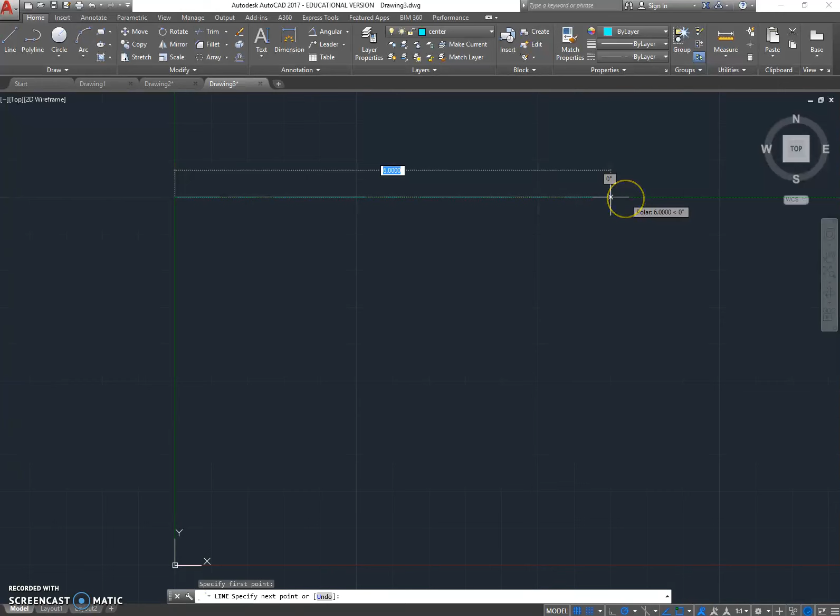I'm going to start by creating my center lines. I'll select the center line layer, and let's make a horizontal center line that is 6 inches long, and then a vertical one that's 3 inches long, and I'll move the vertical one onto the horizontal to establish my center point.

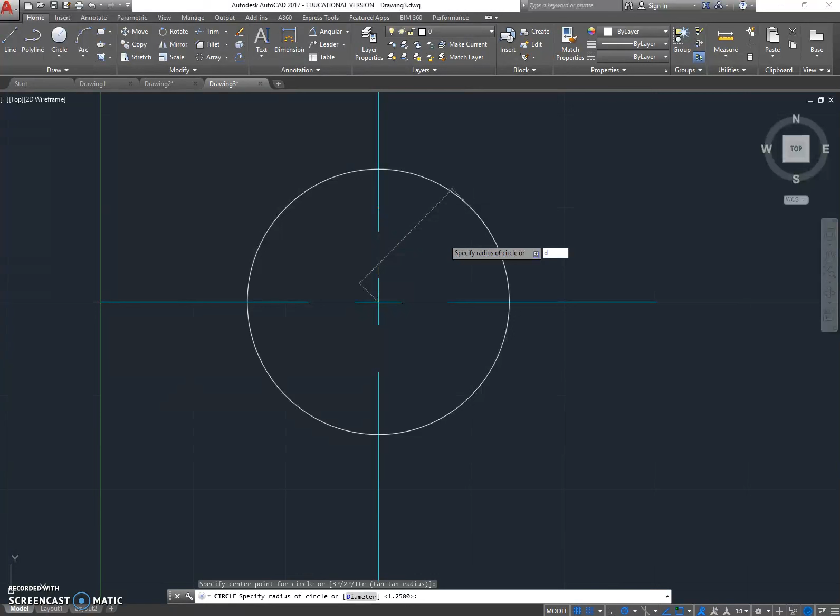This knob has a couple holes in its center. The through hole has a diameter of, well, in the book it says 0.188, but I believe that's 0.1875 - it's been rounded off. The countersink has a diameter of 0.44. I believe that really is 0.44. So I'll select D for diameter, 0.44.

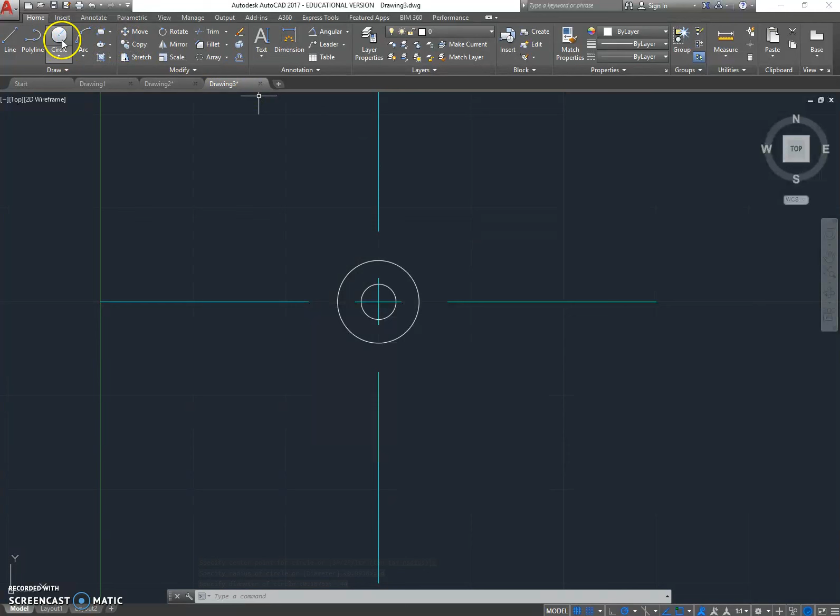The knob itself has a diameter of 2.5. And then it has all these arcs that are cut into it. So I need to find a way to position all of them around the outside of the knob. And we're given that information in the upper left quadrant of the drawing in the book.

What I'm going to do first to help get the first circle located is to do a copy rotate of one of my center lines, the horizontal one. I'll select it, rotate it about its midpoint, select C for copy, and I want to rotate it clockwise, which will be negative 22.5 degrees.

Okay, and also the book shows us that the center point here of the first circle that will be used in the polar array is 1.241 inches over to the left of the center line, and from the horizontal center line it is straight up 0.514.

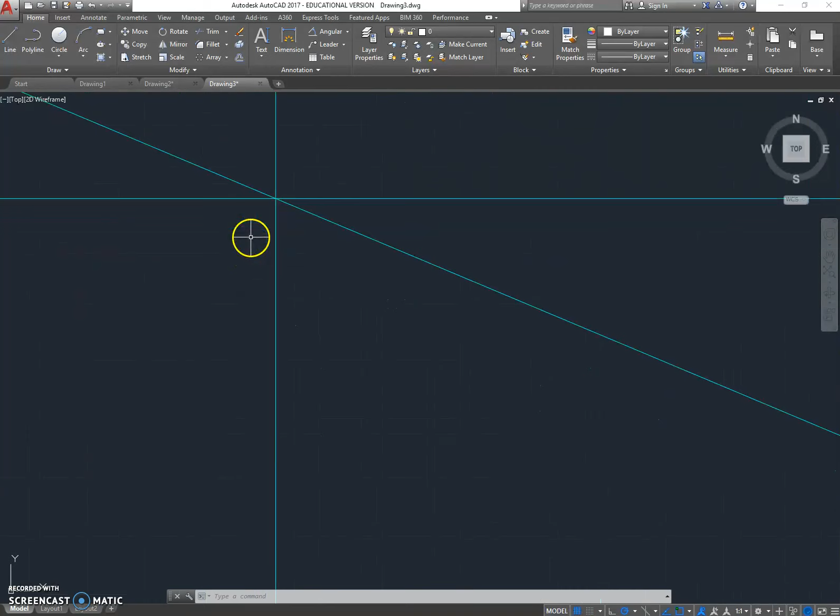Now if we zoom in on this intersection, we'll notice something a little unusual - these three lines do not intersect each other at one single point. That's because the vertical and horizontal dimensions, the 1.241 and 0.514 that the book gives us, are rounded off. The angular dimension of 22.5 degrees, that is not rounded off.

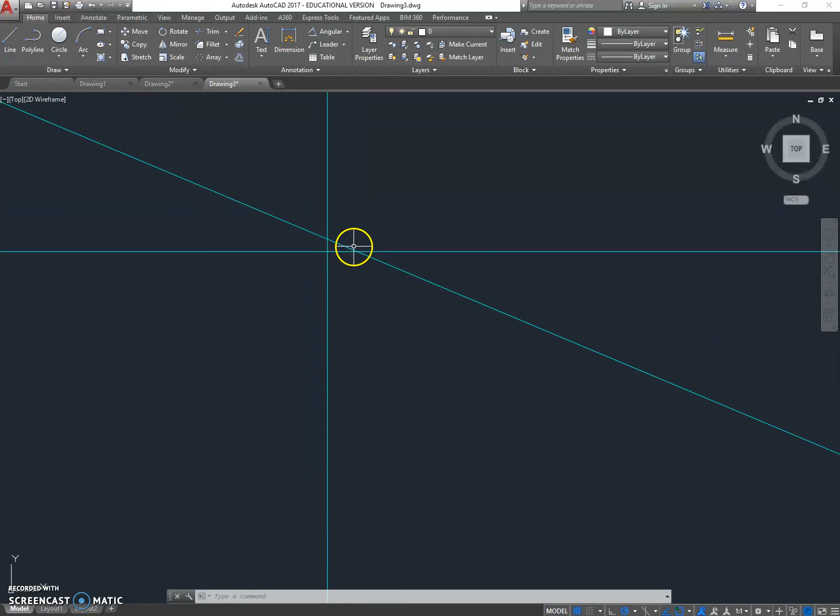So I want to make sure that my circle lies on this line. I basically have to choose one of these two points of intersection. Which one is it? Really hard to say. We don't really have enough information based on what's given to us in the drawing. So I'll just select one of them and draw a circle that has a diameter of 0.625.

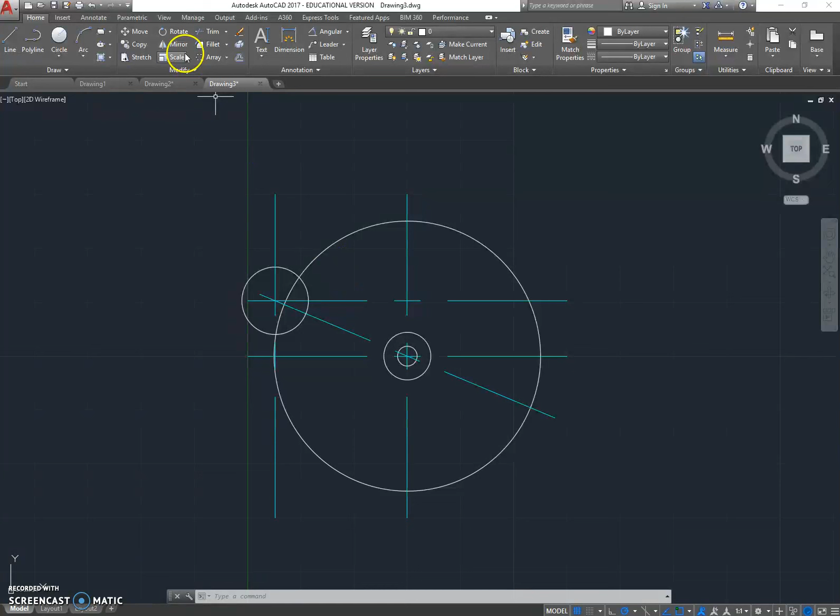I can zoom out now. So this is one of the circles that I want to use to make a polar array. I'll select polar array, select that circle. I want the array to be about the center point here, and I want there to be 8 items in my array. I don't need it to be associative.

Waiting for the array to update here. It's only giving me 6 items. There we go - 8 items in my array, then I can close it.

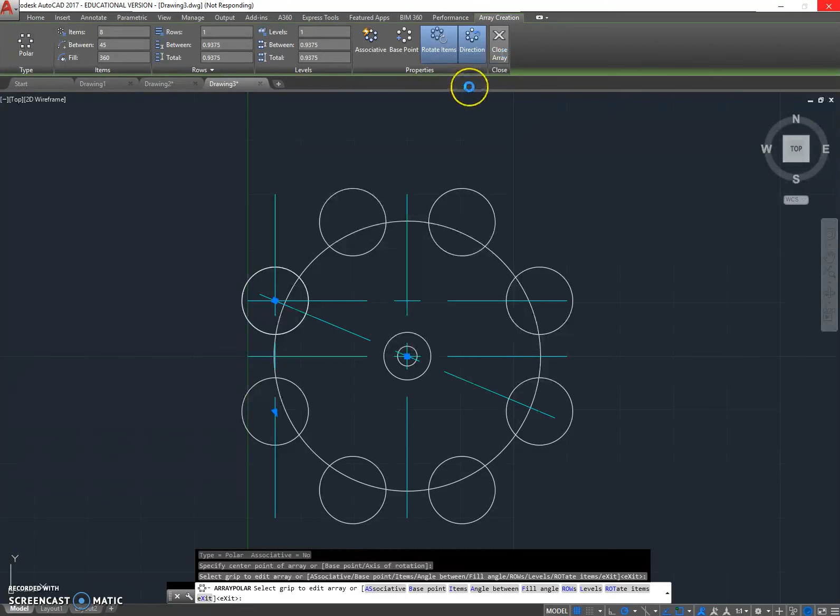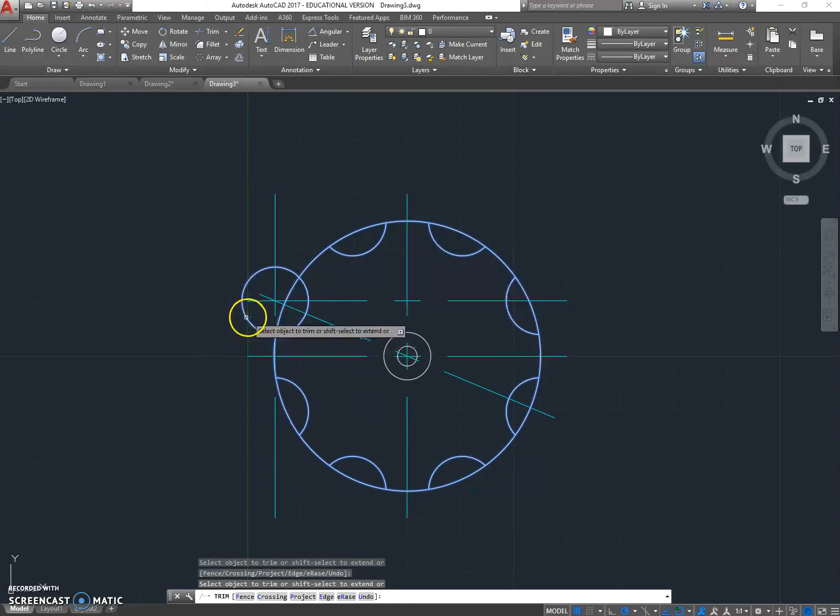And wait for AutoCAD to respond. Now I can do some trimming. I want to select the large circle and all of these small ones - they're all going to be used to do some trimming. Once I have them selected, then I can select what I want to be trimmed. I want the outsides of all of the small circles trimmed off, and I want these points of the large circle, the little arcs inside the small circles, trimmed off as well.

Next, I can use the fillet command with a radius of 0.125, M for multiple, and I can round off all these corners that are left behind by my trimming.

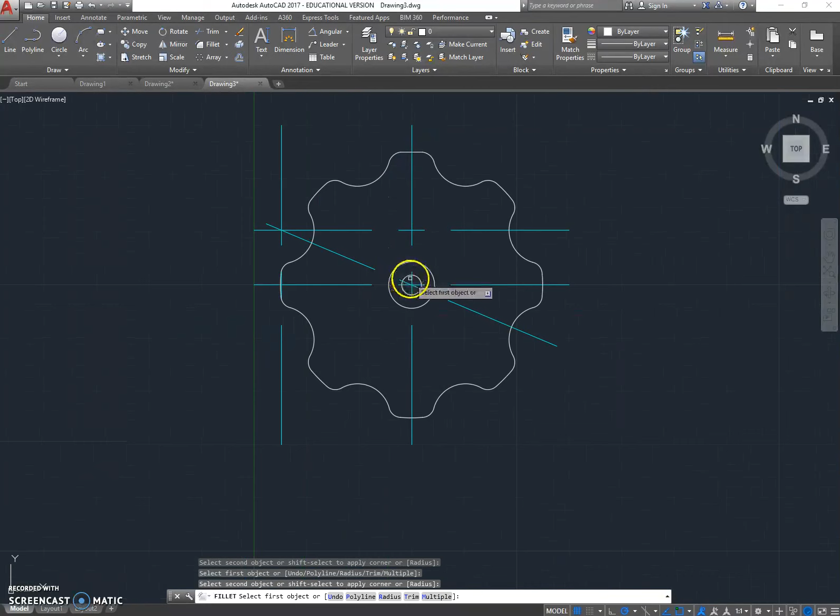So that's the outside profile of the knob. I've got the center hole with the countersink. It also looks like there is a groove in the front face of this knob.

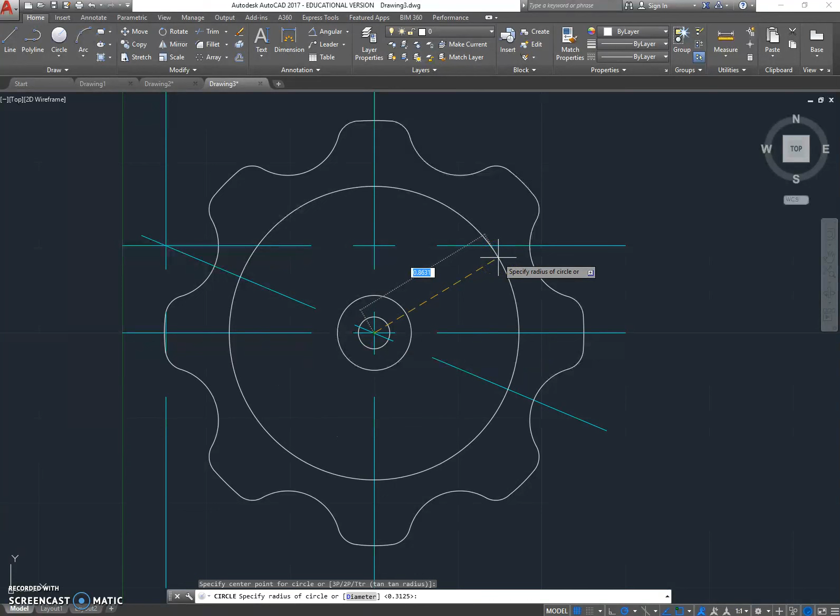So I'll continue with my zero line layer. I'll make a circle at the center - the outside of the groove has a diameter of 1.5625,

and an inside diameter of 1.3125.

Okay, I think that's it as far as the visible lines on the front face are concerned. Now let's look at some hidden lines.

So on the back side, we have a circular edge that has a diameter of 1.875. It's the biggest one.

And then another one with a diameter of 1.1875. And then we have two 1/4-inch holes that are on a bolt circle that has a diameter of 3/4.

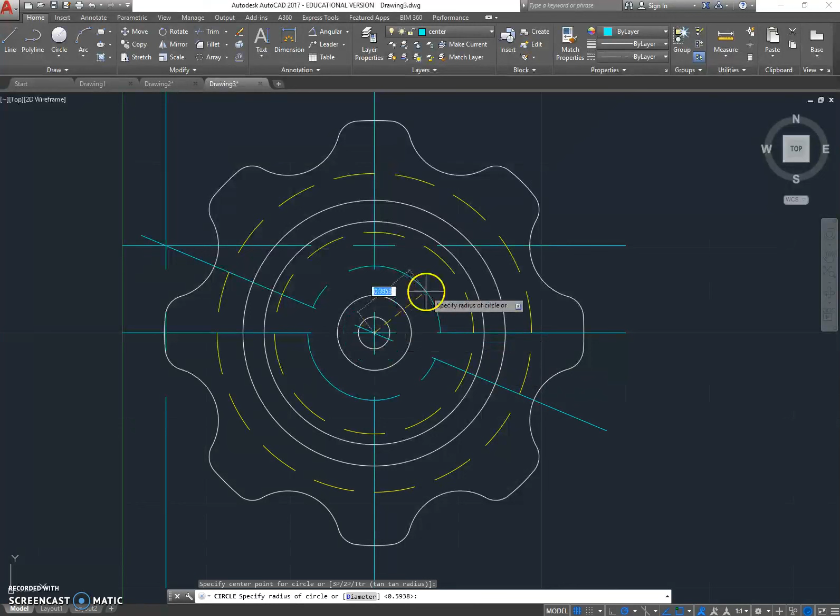So let me draw that bolt circle on the centerline layer. The diameter is 0.75 of the bolt circle.

Then I can switch back to hidden line. These are blind holes, not through holes, so they're going to be drawn with the hidden line layer, and they have a diameter of 1/4.

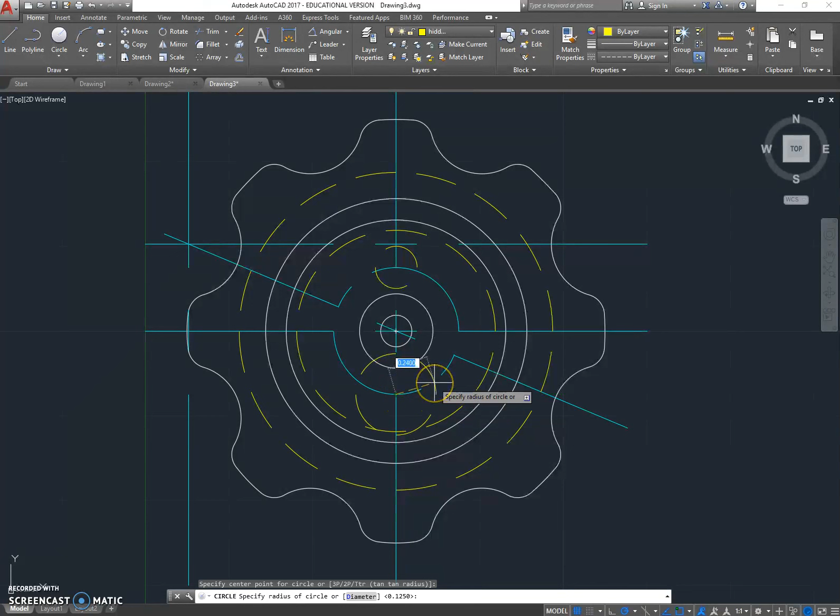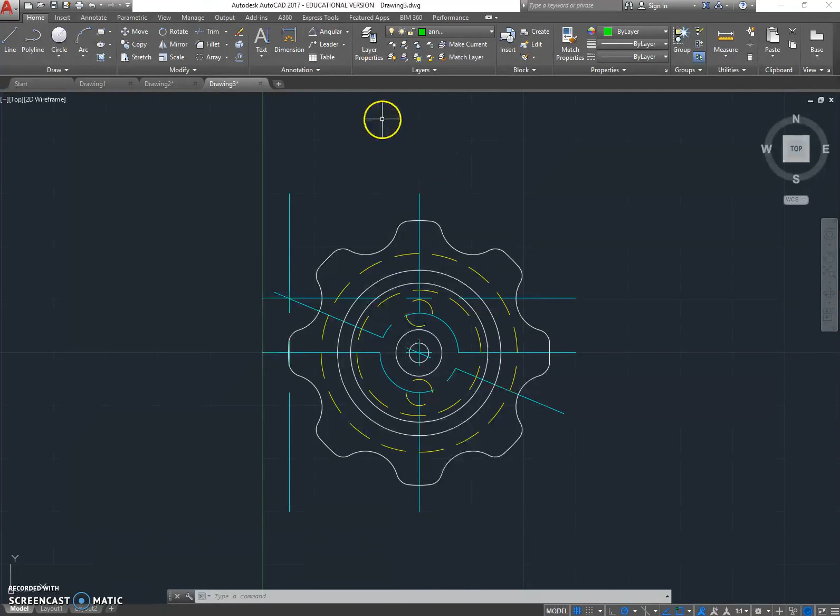And last thing I'll do here, we are expected now to place dimensions. So I'll dimension everything in my front view to make sure it all has been drawn to the correct size.

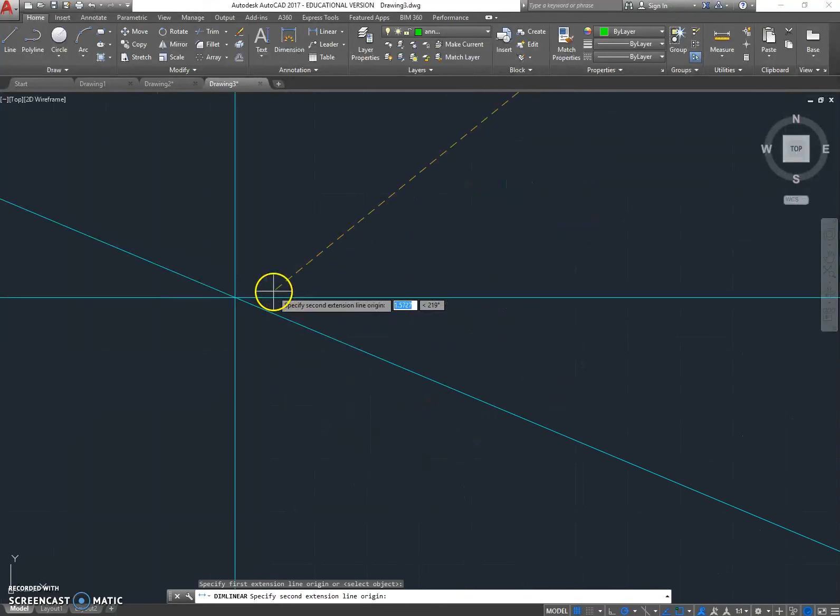So we've got a radius here of 0.125. Linear dimension right here of 1.241.

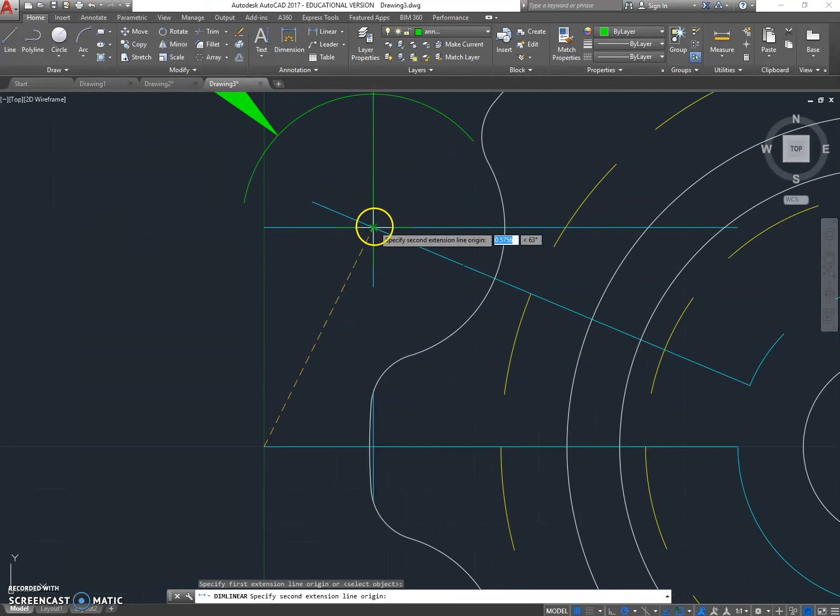Diameter here of 0.625. Vertical dimension there, 0.514.

I could rotate, but I think it's a little quicker to mirror that center line to place an angular dimension between these two lines. 22.5 degrees there.

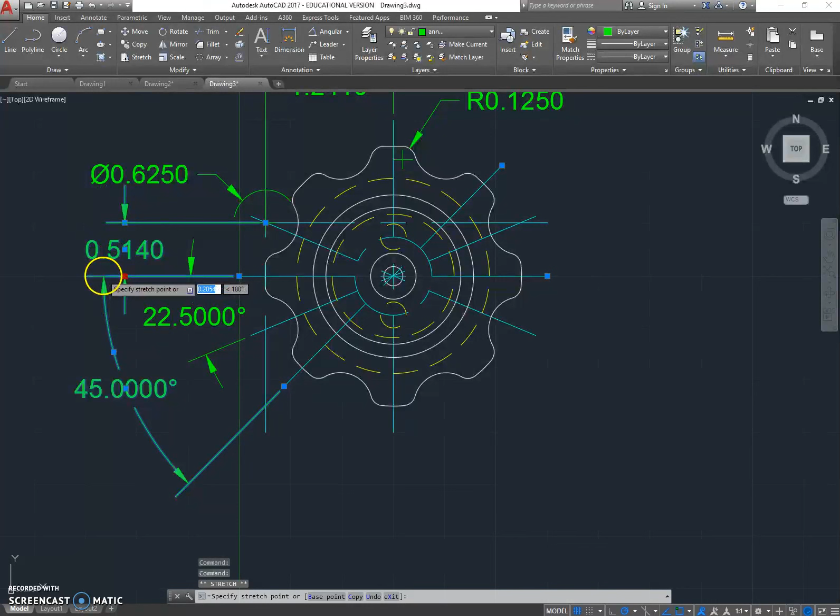No, I think it might be easier to drag this dimension over to align with that angular one. Let's move that up a little bit.

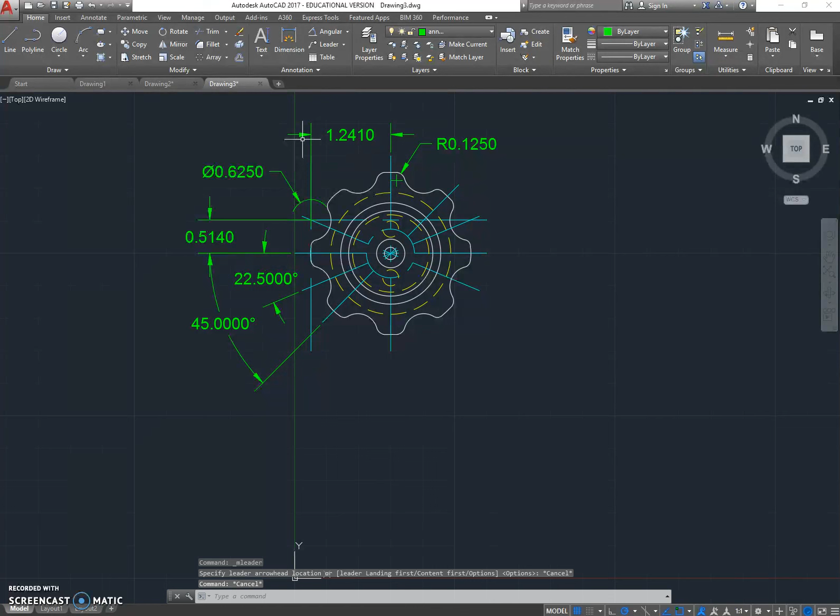And what else? Okay, I've got a leader, a multi-leader. Actually, you know what I'll do? I'll use a diameter. I'll point it to the countersink, and then I can just double click on this text to add some additional text.

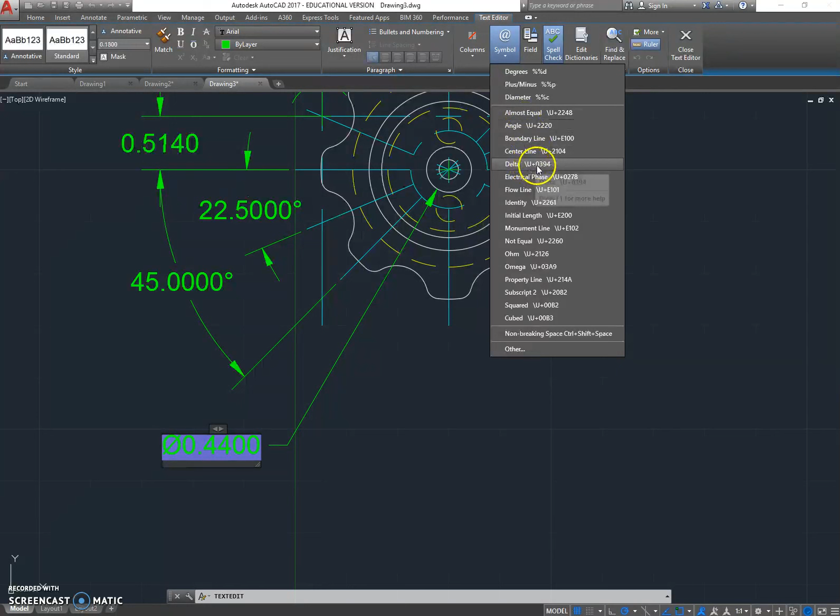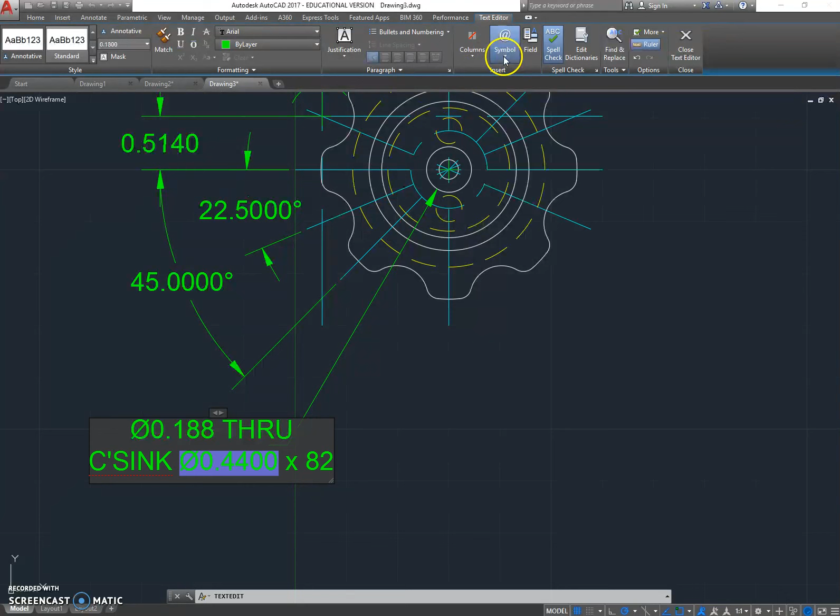Don't want to override the dimension, I just need to add some more information to it. So I want to write diameter 0.188 through, countersink, diameter 0.44, times 82 degrees. Okay, and that's it for the front view.